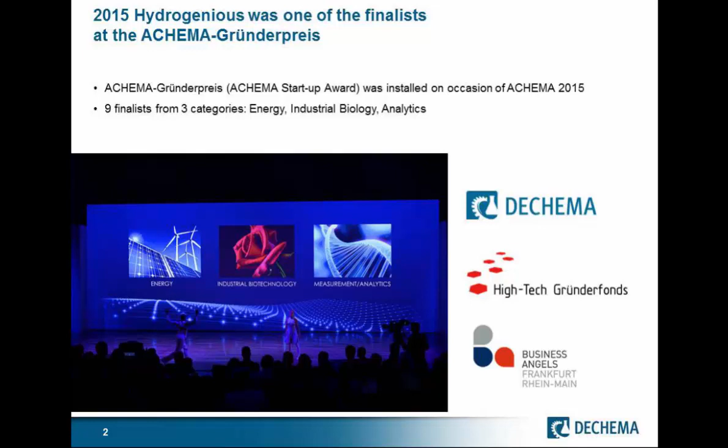Now to our finalist, Hydrogenious. There's no way around hydrogen as one of the most important energy carriers of the future. A simple internet search shows the huge potential in terms of fuel, for example. However, hydrogen does have some serious challenges, and being explosive is just one of them. Hydrogenious has found a very ingenious way to deal with these challenges, and I am happy to introduce Dr. Cornelius von der Heydt, Head of Marketing at Hydrogenious. He holds a PhD in business science and also has several years of business consulting under his belt. I'm very excited to hear what has happened at Hydrogenious in the last 2.5 years since the company took part in ACHEMA-Gründerpreis.

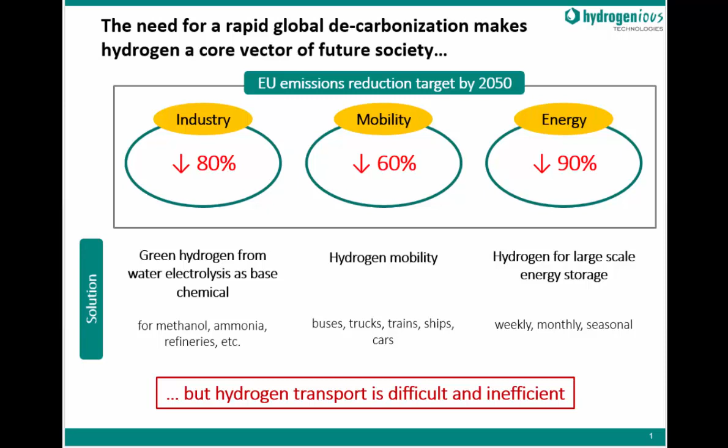Now that brings us to the big question: if you want to connect those dots, renewable energies and basically decarbonizing the world by bringing it from a fossil economy to an electricity-based economy, how can you actually connect those dots, connecting the renewable energy sources to industry and especially to mobility?

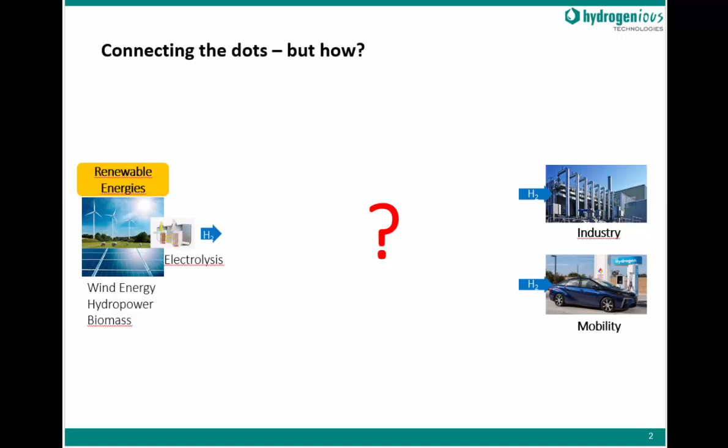As mentioned, the hydrogen technologies, as they're in operation and application today, are typically compressed hydrogen at up to 500 bar for road transport. The standard is somewhere around 250 bar. Those are very, very high pressures, but still, even at those pressures, the storage density on board of trucks and trailers is still very, very limited.

Alternative is cryogenic hydrogen, cooling it down to minus 253 degrees centigrade, which is a highly energy intensive process. You do have higher storage capacities on a trailer, but the trailer costs you €1 million to €1.5 million.

And in both cases, you are dealing with a highly explosive and flammable gas, which is handleable and can be handled in an industrial setting. So the large industrial gas companies of this world today are able to handle that in this setting with trained people. But if you think about bringing that out into public, to public refueling stations, to public wind parks and PV parks to produce the green hydrogen, then those are not technologies where we can actually imagine that could somehow work.

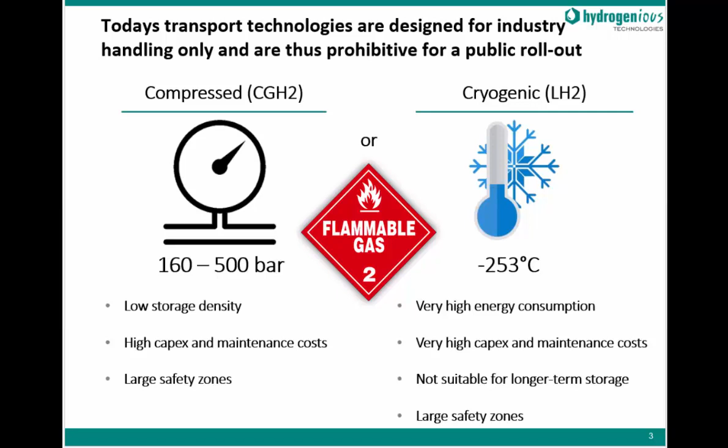But I mean, we are used to a liquid transport system, and why not continue using a liquid system? And that is exactly what we have invented here at Hydrogenious. The liquid organic hydrogen carrier technology does nothing else but enabling to carry a liquid instead of a highly flammable gas at either elevated pressures or very low temperatures.

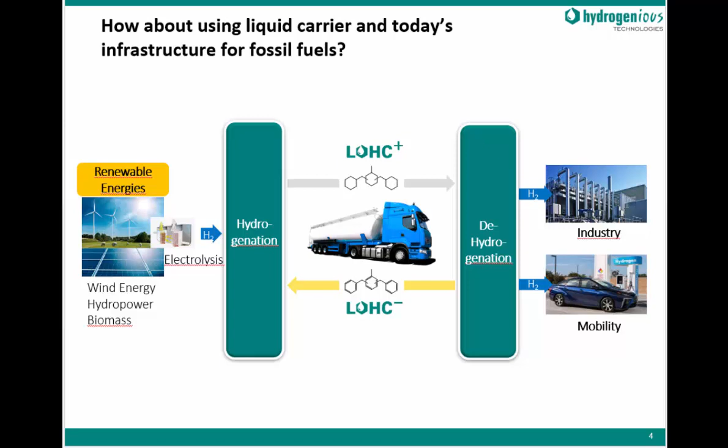Now, how does it work? The process from a chemical perspective is a reversible hydrogenation and dehydrogenation process. Both are catalytic processes. In the hydrogenation, on the left-hand side, we call the hydrogenation plant a storage box, because it basically stores the hydrogen. We have hydrogen that comes in at 25 to maximum 50 bar pressure into a hydrogenation reactor, and there it comes into contact with a catalyst and with a carrier liquid.

The carrier liquid that we use is widely known in industry under the brand name Marlotherm. Chemical name is dibenzyl toluene, and this actually is a carrier liquid, I'll come to it in a second, that is already used today in large amounts. Then what you have is an oil that you can store in the infrastructure of fossil fuels as it is already existent today, which is today used to transport diesel or gasoline.

And then you have the dehydrogenation, which we call the release box, where the hydrogen is released again, and you can reuse the carrier liquid, which is then called LOHC minus, basically because it does not have hydrogen on it anymore, and then can be used in a circular economy, basically. So it's very important that the carrier liquid is not consumed; it is really just a carrier.

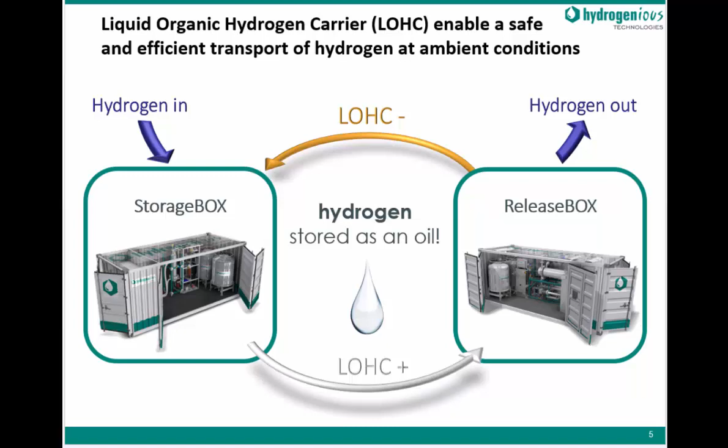Now, from a more technical perspective, which I'm sure a lot of the people in this call are interested in, as already mentioned, it's a catalytic process. Both processes are catalytic. The hydrogenation at 25 to 50 bar, an exothermic process at roughly 250 degrees centigrade, where the hydrogen reacts at the catalyst with the carrier liquid. The carrier liquid is an unsaturated hydrocarbon called dibenzyl toluene. It's basically 3 toluene rings.

And as you can see on the top picture, that's actually how we store and transport hydrogen in the Marlotherm today. You can see that it is slightly orange, reddish. That is actually also the color when it is not hydrogenated. It's somewhere in this orange-ish color range. And then when it is hydrogenated, so has been saturated with hydrogen, you have perhydrodibenzyl toluene.

And as you can see at the bottom, you have a clear IBC there that is actually filled with 1 cubic meter of LOHC, and 1 cubic meter of LOHC can store up to 57 kilograms of hydrogen at ambient conditions.

The dehydrogenation process then is an endothermic process, so it's actually the corresponding process from a chemical perspective to the hydrogenation. The same amount of heat that the exothermic reaction at the hydrogenation releases, you have to insert at the dehydrogenation site at a temperature level of roughly 300 degrees centigrade.

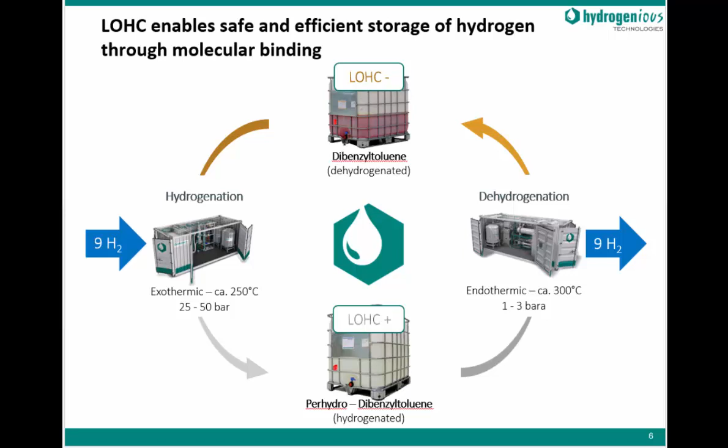Now, the big advantages of this technology compared to existing technologies is, on the one side, the storage density. The LOHC has a storage density of 6.23 weight percent. I already mentioned the 57 kilograms per cubic meter. That actually is comparable from a volumetric storage density to pressure storage at over 2000 bar pressure, because hydrogen is a gas that behaves very non-ideal in elevated pressures. So the storage density does not really increase with increasing pressure levels.

It is very easy to handle, as already mentioned, as a diesel-like liquid at ambient conditions. So you can open the tank, and I'll show you a small video briefly on what happens or does not happen to the carrier liquid if you don't treat it too nicely.

And most importantly, it is very low priced. So already today, in the small quantities that we buy it at for our systems here, we pay less than 5 euros per kilogram. And if you set up a larger scale infrastructure based on LOHC, the prices will go down to somewhere between 2 and 3 euros per kilogram. And that translates to a hydrogen storage price of somewhere around 50 euros per kilogram of hydrogen.

If you compare it to today's costs of storage capacity, for low pressure, so talking 30, 50, maybe maximum 100 bar compressed storage, you're somewhere between 200 and 500 euros per kilogram storage capacity. And for high pressure storage at 500 bar and above, you're at 1,000 euros per kilogram of storage capacity, just because the materials that need to be used for those elevated pressures are expensive, and therewith the whole capacity becomes expensive.

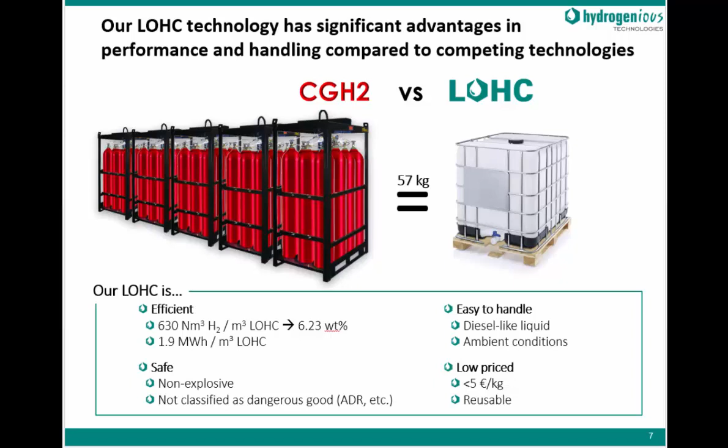Now, a lot of you in the call might be familiar with REACH registration. Besides the safety in terms of non-flammability, non-explosiveness, and the advantages on storage density, we have registered this liquid loaded with hydrogen under the European registration REACH, and it is not classified as a hazardous substance, so it's not classified as a dangerous good according to ADR and all the other transport regulations. And it is not fish toxic, for example, so it's very safe and easy from a handling perspective.

And that is another very strong cost advantage in terms of operational cost, because you are allowed to drive through tunnels without any problems. With compressed or molecular hydrogen that differs a little from country to country actually. You can transport it on trains and on ships without any problems, and therewith reduce the cost of transport of hydrogen even further than it is already being reduced just through transporting it in a normal diesel trailer.

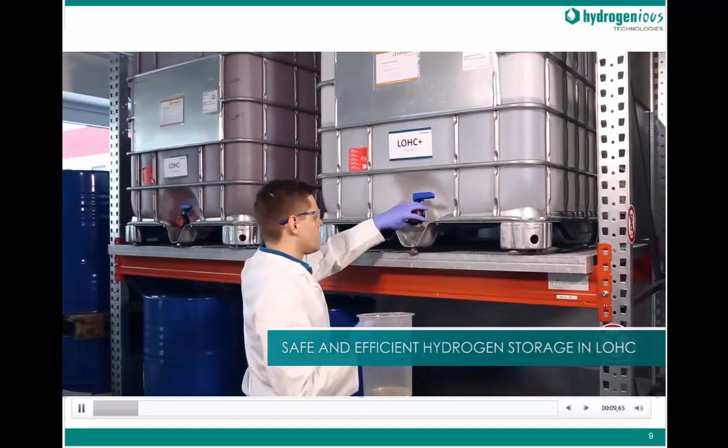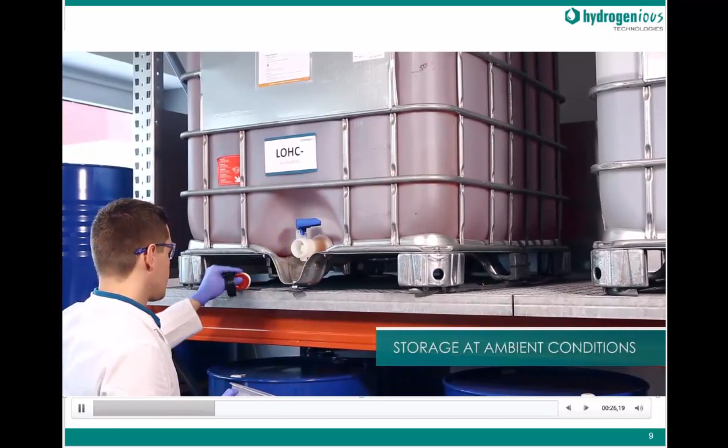So that is on the regulatory side, and I promised you a little video on the safety side of our hydrogen. A few months ago we've taken our best looking intern to test a little bit in the kitchen. What you can see here on the right hand side, where he is now, that's LOHC loaded with hydrogen. We actually store it like that in a normal plastic IBC. And there again you can see the difference in color from transparent to orange-ish. So that's the unloaded liquid.

And then we have sent him to a little showroom kitchen to torture the material a bit. Now everybody can imagine what would happen if you do that to a molecular hydrogen source in whatever way. That's not necessarily recommended.

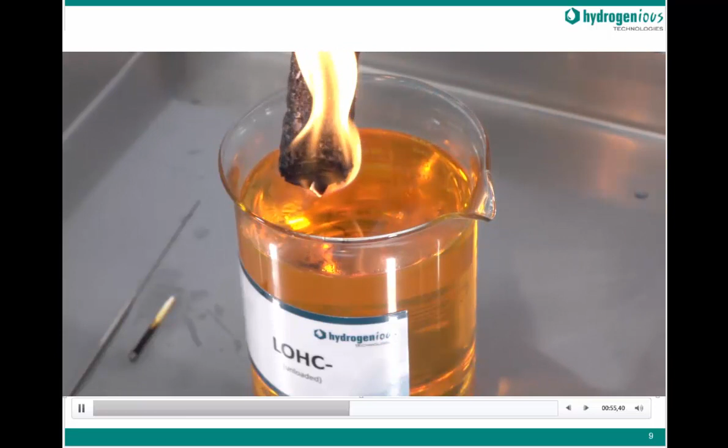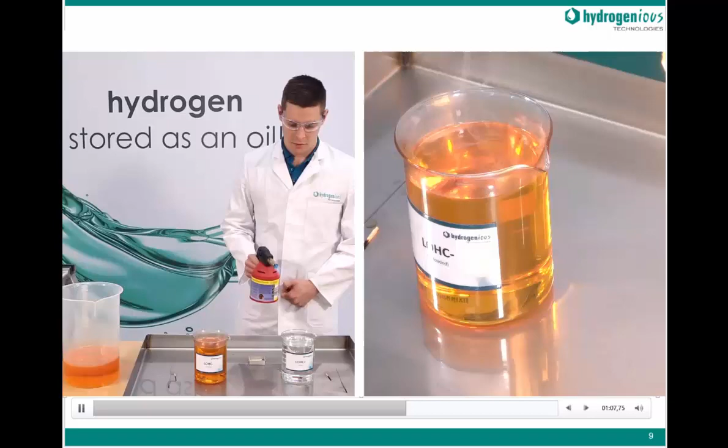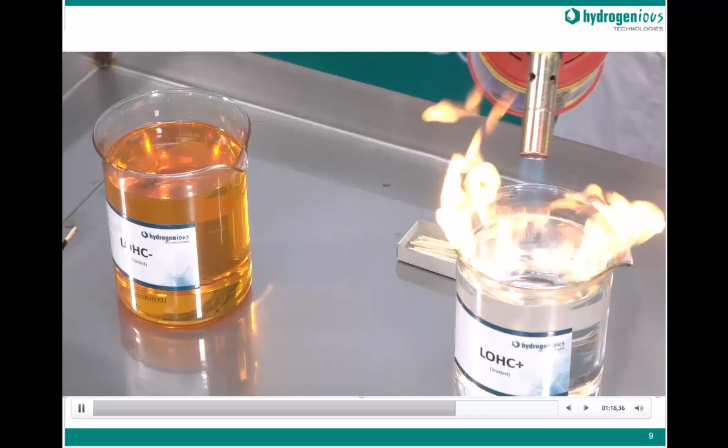Now, the most important aspect, however, is of course the cost side. Does it actually bring a cost advantage? And yes, it does. What you can see here is the cost structure of a typical hydrogen delivery. In this case, for 300 kilometers, that's kind of the maximum that is somehow viable with today's technologies.

And as you can see, especially for compressed hydrogen, the cost of transport is actually by far the biggest cost block in this whole equation, and that is because the storage density of hydrogen on those tube trailers is so low. A typical 250 bar hydrogen tube trailer can actually only carry roughly 350 kilograms of hydrogen. That means you're actually driving around with 99% steel.

Those 500 bar trailers, they can store up to 1,100 kilograms of hydrogen, but because the pressure is so high, you actually have to have very special carbon fiber tube trailers that cost you somewhere around 800,000 euros just the trailer. And you're still not at the up to 1,800 kilograms that we can reach with LOHC, and that you can transport in a normal, very cheap diesel tank trailer.

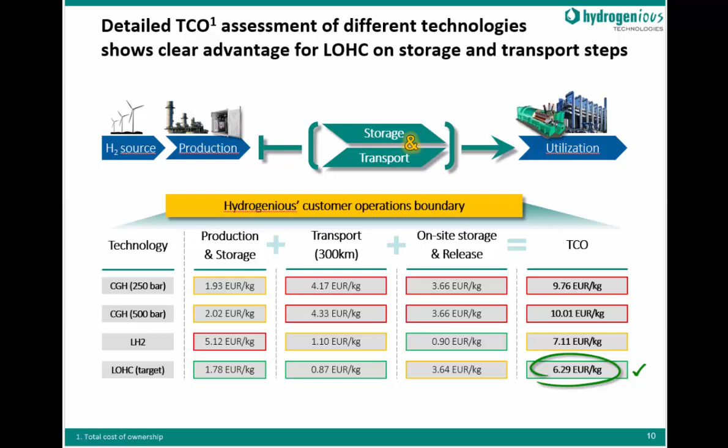Now, of course, the question is, who are we? We're Hydrogenious Technologies, founded in 2013, a spin-off of the University of Erlangen. And we're basically the result of research that has been conducted at the university since 2009, initially in a joint research project with BMW on the liquid organic hydrogen carrier technology. And by now, with over 25 patent families filed globally, 5 of them have actually been granted already. We do consider ourselves to be the global technology leader in this LOHC field.

There are other companies also working with LOHC. There's Chiyoda and Hitachi in Japan. There's a company in China, but they all use different carrier materials, which from our perspective have significant drawbacks in terms of toxicity, flammability, cost of the carrier, hydrogen purity, easiness to handle, and so on.

We have been able to develop very high-class partnerships, for example, with Clariant, the catalyst manufacturer. As I mentioned, both processes are catalytic processes. Sasol is the producer of the carrier liquid, whose brand name, as mentioned, is Marlotherm, because it is produced in Marl in Germany, and it's a thermal heat transfer oil.

Anglo Platinum, the largest platinum group metals mining company in the world, is actually our investor. They have a general interest in hydrogen technologies because hydrogen technologies typically use platinum group metals.

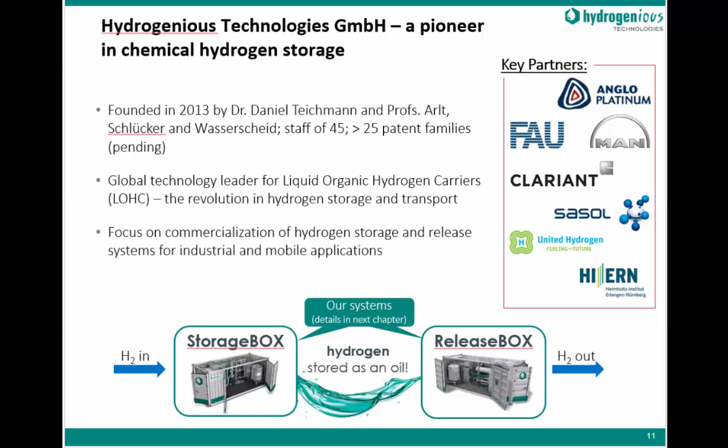And MAN, for example, there we're not working with the engine or the truck manufacturing departments, but with the Deggendorfer Werft, which is a world leader in large-scale reactor manufacturing, especially for chemical and petrochemical processes in larger scale, which we see as the target setting for our technology and the target application.

We have the first systems in operation actually since May 2015, the part on the left-hand side, and since June 2016, the part on the right-hand side that you can see on this slide. So the overall end-to-end setting, starting with a nearly 100 kilowatts peak PV system where we can use the green electricity to produce green hydrogen in our own in-house electrolyzer from Siemens, and then directly hydrogenate the liquid, and then we transport it to Stuttgart, of course not in one of those large tank trailers, but we actually use a plastic IBC in the back of a Sprinter. So that is how we transport 50 to 60 kilograms of hydrogen.

A little side effect or little goodie on the side, we do have a kids swimming school at the front of our building, and with the exothermy of the hydrogenation process and also a bit from the electrolyzer, we're actually heating that swimming pool for the kids. So that is a nice little side effect.

This whole setting here is not a commercial setting, of course. It's a technical proof point and a technical viability proof. And the system on the right-hand side at the Fraunhofer is actually connected to a PEM fuel cell. So we do also directly show that our technology in terms of hydrogen purity released is absolutely suitable for fuel cell applications, and that fuel cell then feeds into a 600 volt DC grid for an electric car filling station.

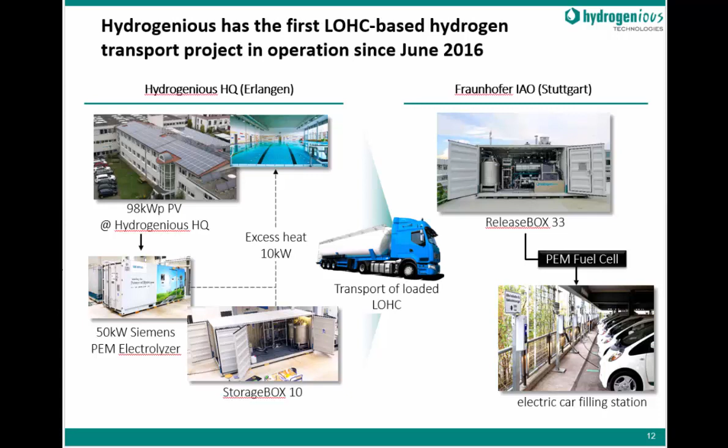That is the system in Stuttgart, and you can basically see here in the center, that's the core part, that's the reactor that is able to release 3 kilograms of hydrogen an hour. It is connected to a PEM fuel cell with 25 kilowatts, and what you can see here on the left-hand side, that's milk tanks. That's where we store the LOHC in. That's a milk tank, just as any farmer uses it for its dairy milk and so on.

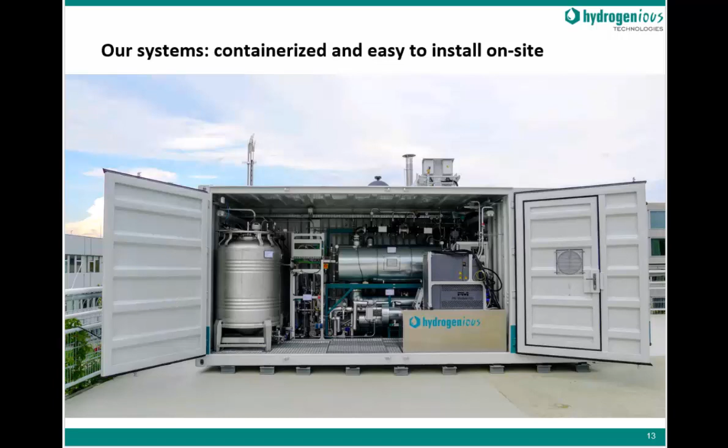The container is located on the top of a parking garage in Stuttgart at the Fraunhofer IAO, and as mentioned, integrated in a smart 600 volt DC grid from Siemens actually. We also do have our first commercial project underway now. It's actually being delivered in the next 3 to 4 weeks, 2 of those 3 systems, and the third one follows beginning of next year.

Those are demonstration systems for a company called United Hydrogen Group. That's a regional hydrogen distribution company out of Tennessee. They supply a bit over 50 customers, and the application will, on the one side, be a hydrogen supply to power plants, where hydrogen is used for cooling the power generators, and the other one is steel treatment, so annealing of steel, where also a lot of hydrogen is consumed.

And what brought United Hydrogen to do those field tests together with us under a commercial contract is actually their interest in exactly the factors that I mentioned earlier: safety, the increased transport distance that is possible because the transport capacity per trailer is so much more than with conventional technologies. That is an industrial setting. The hydrogen used is a byproduct from chloralkaline electrolysis, and the consumers are industrial.

You from the chemical industry will be aware of that. It is over a $100 billion market globally, transported hydrogen, the second biggest gas market in the world. So of course, for us, it's a very interesting market. However, it's also a highly sensitive market, and that's actually something that started for us with the ACHEMA and the ACHEMA-Gründerpreis, because initially that whole technology was designed and thought to be most viable as a large-scale energy storage technology.

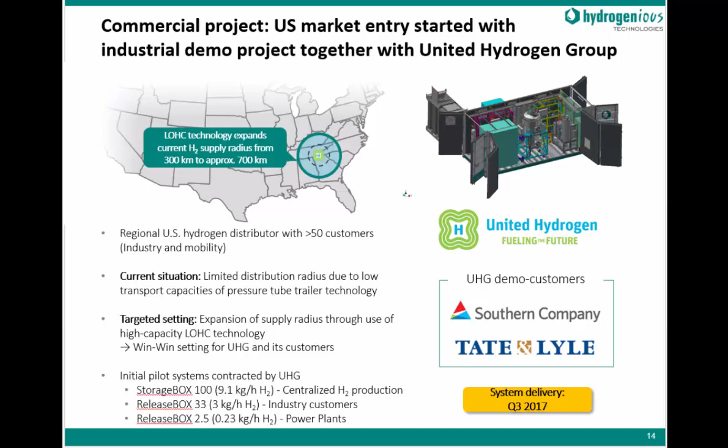Since September 2016, we're also part of the so-called Kopernikus research program. That's the largest German research program funded by the German Ministry of Research. It's basically 4 sub-programs. One is called Power to X, and in this Power to X stream, we are in the project Decentral Hydrogen Logistics, which looks into supply of hydrogen refueling stations with LOHC, and this is a very promising project for us because, as mentioned, the industrial applications are very interesting for us. However, this market is very conservative.

In the hydrogen mobility market, there's a big acceptance of innovation. There's a big acceptance of piloting, of let's do it together, let's fund the pilot, let's just test it, which of course is not possible in a full-scale industrial plant which is in full commercial operations.

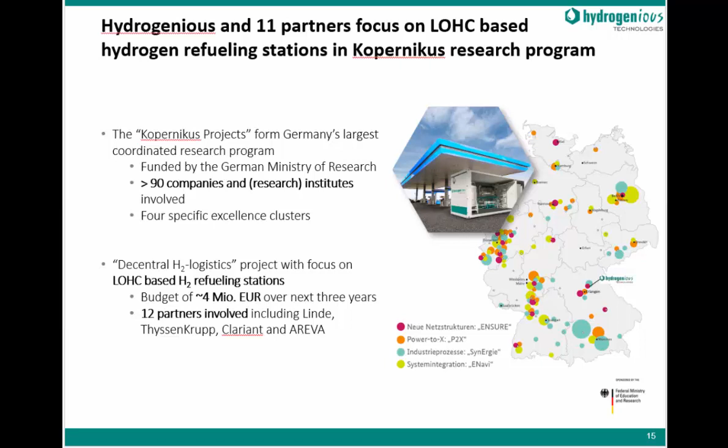So this is a first step into hydrogen mobility and supply of hydrogen fueling stations, and we have just been granted a second project in this field from the European Union under Horizon 2020, a project together with 4 partners. Woikoski out of Finland, a leading Scandinavian industrial gas company, is the operational partner in this consortium, and there we will put one of our release box systems at a refueling station. The storage box, so the hydrogenation site, will be linked to a water electrolysis that they operate in Finland.

And with that, we can actually demonstrate the whole chain from green hydrogen out of an electrolyzer to the hydrogen in the car, and also prove that our technology fulfills all the required norms and standards and has the efficiency needed.

The total duration of this project is 3 years. It's about to start now in October, so then it will go on until October 2020 with a total funding of 2.5 million euros. That is basically an overview of Hydrogenious and our activities.

That is basically the end of, let's say, the LOHC presentation. Maybe just a quick word on the ACHEMA-Gründerpreis from our perspective. As Marlene already mentioned, we're one of the 3 finalists in our sector. And even though we didn't win this award, especially the days at the ACHEMA and the discussions we had there, but also the press coverage afterwards, did bring a lot for us